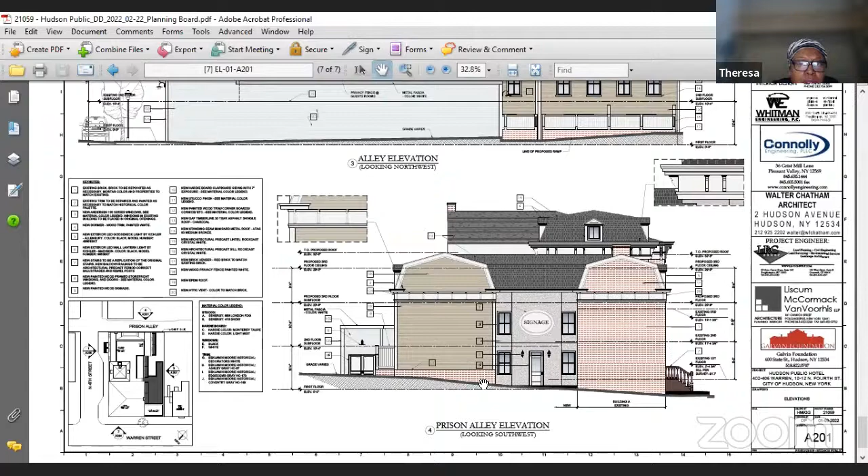Can I ask you a question? Absolutely. Go down, go to the Warren Street figure.

See the steps on the side? This is the reconstruction of the steps that are on the North 4th Street row houses. They're way in the back, they don't belong there in other words. No, they're down here, so you're seeing that down the street.

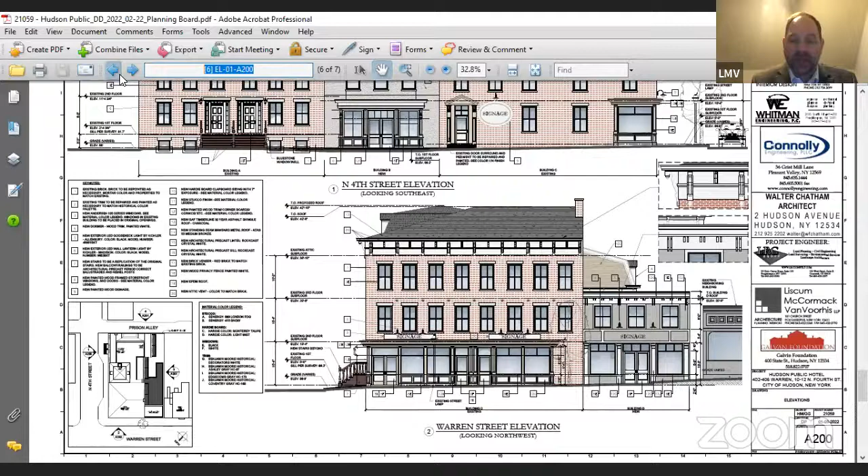And when you see the site plan, if we jump back to the plan, you'll see these are down here. You're looking at this facade, but those are way down the street. Okay, thank you, they looked like they were on the corner.

Yeah, elevations are a little misleading. Nobody ever sees a building flat on, perfectly straight.

So we've identified a great deal of information. We've called out all the materials, the windows, and all the colors, and hopefully there's adequate information for you here. We've identified some of the cornice reconstruction where we're going to be doing new cornices and have provided some detail on that as well. So I think we feel we've got a fairly complete design intent here for your reaction and subsequent submission to the Historic Preservation Commission.

So with that, I'm going to turn it over unless anyone has any questions on the elevational architecture. Have you submitted to Historic Preservation already, or is that coming up? Not yet. We felt the best process would be to start with your board for initial reaction, and then we will be submitting within the next month or so to Historic.

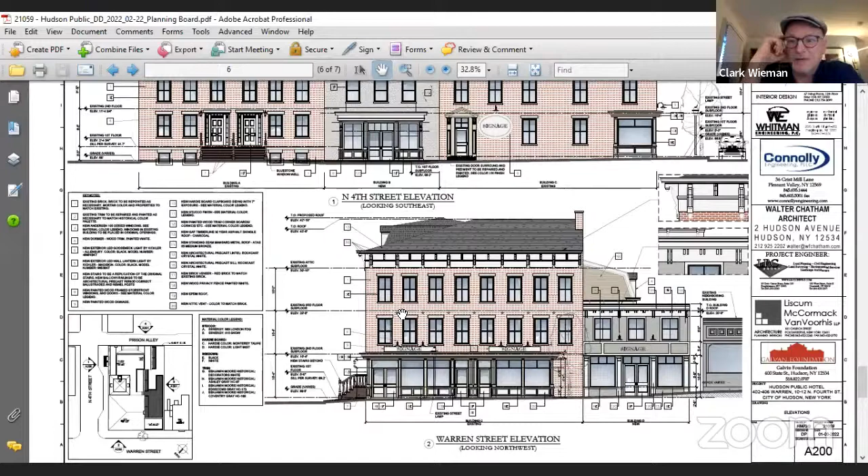Great, and I guess here's my initial reaction. That middle piece that you're adding between the two historic buildings, I'm no architect, but it seems to be wanting to look historic while still contrasting with the other two historic buildings. I understand the general architectural philosophy of not necessarily trying to replicate historic buildings, but making it stand out. But it just seems to me a completely different architectural look than the other two original structures. So maybe you can speak to that a bit. Again, just me as a non-architect, but someone interested in good design, it seems like it's sort of out of place and doesn't fit well with the other two structures.

Understood. Let me give you a little feedback of what we received from SHPO's review, as well as the rationale for the need for this connector building to be taller. SHPO felt that this connection was a little too ornate, so we've simplified the cornice, simplified the windows, simplified the window headers, really pulled that down, and went with a simple gray stucco material there. And that's a 2 to 3 foot step back.

The reason we have the mansard roof up on top - the other thing they didn't like was a very ornate dormer, which if you recall from last month had a much more sculptural dormer on top. So we stepped that back to match the dormers on the row houses. But the reason this has a taller volume is we have an elevator in this building, and the elevator goes to the 3rd floor and is required to have an overrun, which is fairly close to the facade. We really didn't want a modern look of a penthouse structure sticking up out of the building - we wanted to keep that inside a roof volume.

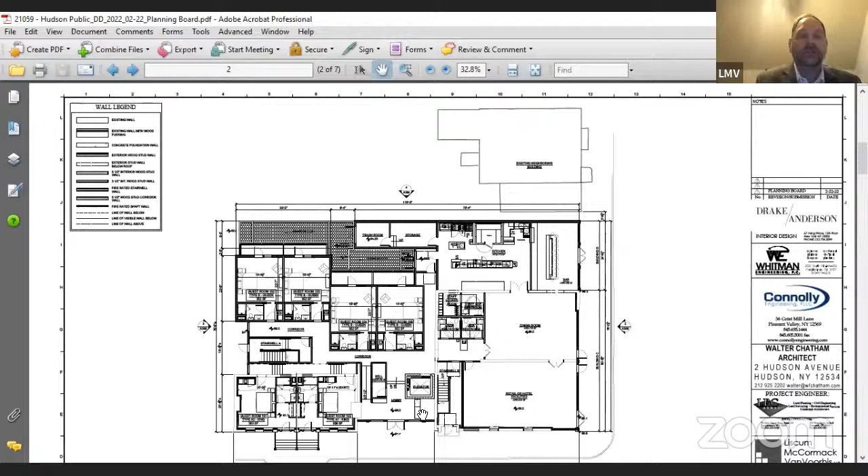Let me jump back to the plan. So the elevator's right here, that close, and it needs to have that 5 or 6 foot overrun from the top of the ceiling of the third floor. So we're trying to keep that enclosed in a roof volume, and that's why, serviceably, that building is volumetrically taller.

Okay, I mean that's helpful. We thought it would look funny, quite frankly, if we had some kind of a box penthouse sticking up out of the roof. North Fourth is narrow enough, but the walking view down Warren opens up enough that you would see it from a distance before you crossed North Fourth, so we wanted to try and keep it enclosed.

And in January, a member of the public had asked a question - I don't know if this is the right time to ask it - about where you're placing your air conditioner units and stuff on the roof, and we also received some questions regarding the noise associated with that. So we provided you with an engineer's report on that. The HVAC systems proposed for the hotel are going to be ductless central heat pump systems. There are several outdoor heat pumps connected to indoor air handling units. Those will be on the roof, but beyond the facade - you won't see it, it's actually internal.

We're specifying Mitsubishi R2 Hyperheat product lines. I don't expect you to know what those are - I don't really know what they are, but they are one of the most energy efficient and quietest products on the market today. The noisiest of the outdoor units will have a sound power rating of 68 decibels maximum, taken from 3 feet from the unit when running at full speed, which will be very rare. That'll only run at full speed on the very hottest and very coldest days. In the spring and fall, when the hotel requires heating in some rooms and cooling in others, the outdoor units will not run at all.

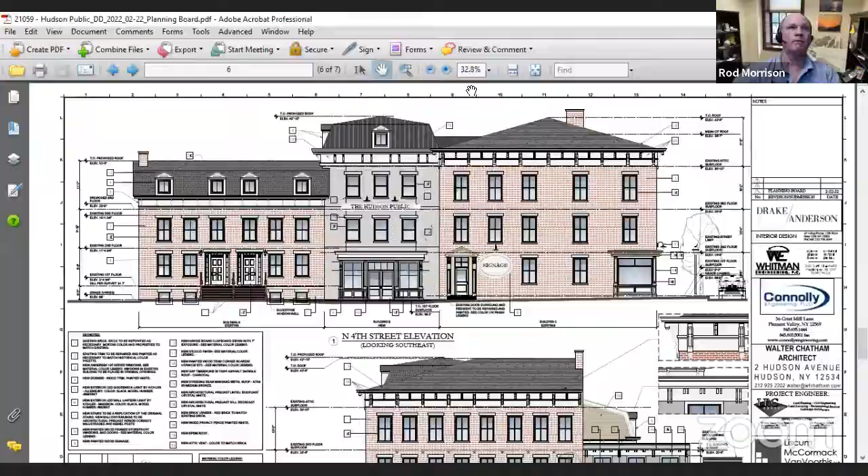All right, Rod, are you good to jump into site? I'll stop sharing. Sure, yep. Everyone, hi, Rod Morrison from the LRC Group. We're the civil engineers and landscape architect working with the rest of the team here. If I can share a screen as well, let me jump over to it.

Well, that doesn't help you.

Let me jump over to - we created a somewhat colored site plan to show you what our work would be, to go along with Don's and the architectural team. Again, North 4th here, the section of Hudson Public we were just talking about is in the middle in this location. So we've created an accessible entry with a step in, a walk in from North 4th, proposing the reconstruction of this entire side of North 4th to be a matching concrete surface grid pattern similar to Warren Street.

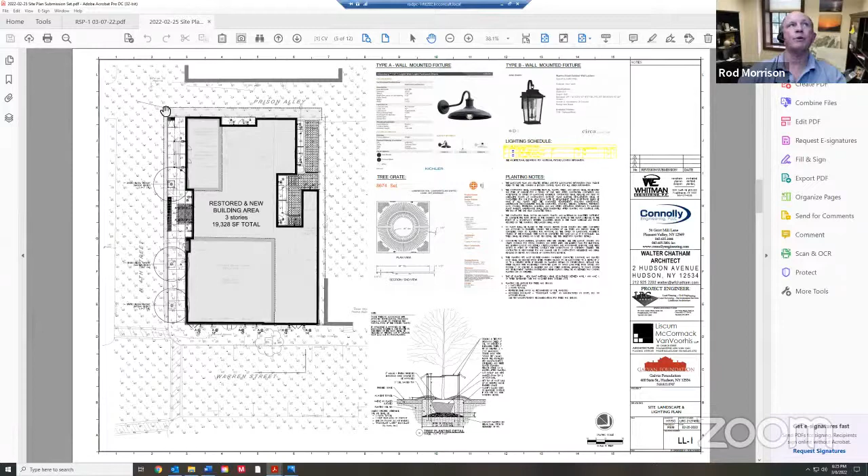The other wall-mounted fixture, which sits closer to the building, would be infill in between those. Those would be largely on North 4th Street, where the more prominent entrances on Warren Street would all have this more substantial fixture. In addition to that, the tree plantings would have the typical matching tree wells. Anywhere here in Warren Street where we ended up needing to repair or infill, we'd be matching that concrete grid pattern and really reestablishing the nice sidewalk presence down to the intersection, and then extending that for quite a tremendous improvement along North 4th out to Prison Alley.

I think in the scope of our element, again, there is a walkway out of the building out to Prison Alley. That's been made all accessible. Our element is a little bit limited. If there are any questions about that, happy to take them.

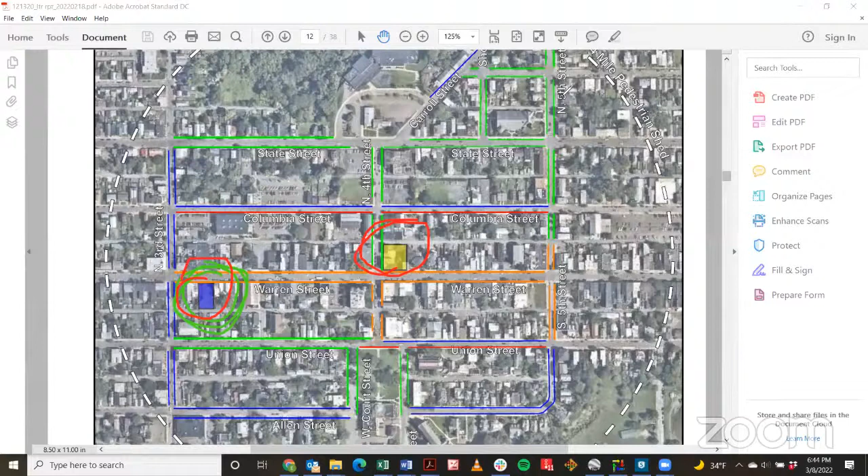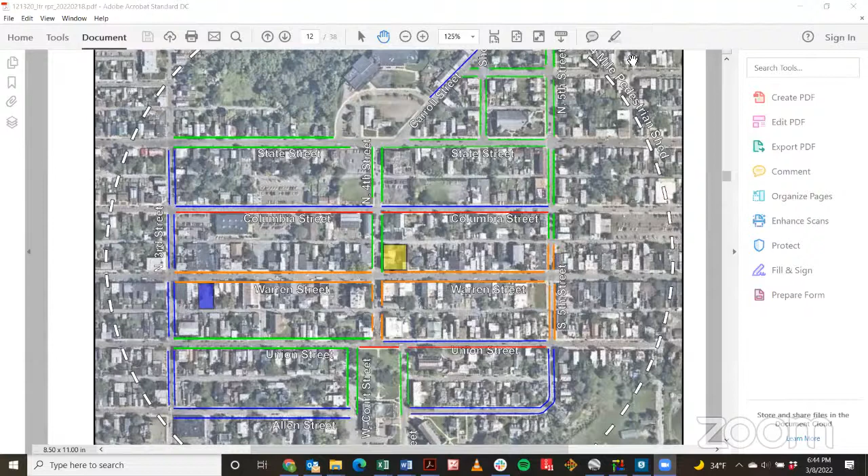Well, it doesn't really matter what lot we're talking about. What I'm calling into question is that wandering around at midnight and talking about what's available at midnight does not actually address the fact that your guests are going to want to park not at midnight, but at 6 or 7 in the evening after they've checked in, and then go about their business, going to restaurants or whatever in the morning. So I don't think looking at what's available at midnight is the correct approach. That's all I have to say. I will stop, thank you.

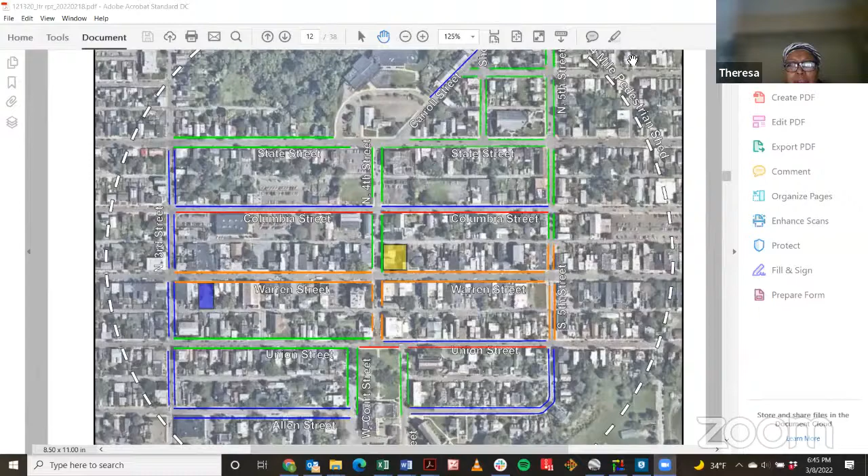I have a question too, just to piggyback on Margaret's. As a resident, board member, and previous business owner on Warren Street, I do recognize those municipal lots get full on a regular basis. Literally, it doesn't matter what time of day it is, there's nowhere to park. I'd be lucky if I can find one parking space. So my question to you all is, have you considered valet and perhaps purchasing spaces down by the train that you could utilize as parking for guests?

Mark? Well, we have not considered a valet to park close to the train, just because the assessment does show that regardless, that municipal lot is only about 23 spaces.

The assessment we did showed there's more than adequate on-street parking and metered parking that becomes free overnight to accommodate the hotel. We're not saying we're relying on that municipal lot, we're just saying it could supplement it.

The analysis was done between 10 and midnight. I think it was done between 10 and probably 11:30. So it wasn't like we were out there from midnight till 6 in the morning, it was done a little earlier.

Yes, it's not like the hotel requires no parking earlier in the day, but the maximum is past 10 o'clock, when people are coming back. I go to lots of hotels and I agree, sometimes you come back at 6, but sometimes I don't get back till 10:30. That's when the maximum number of vehicles are required, past 10 o'clock at night. But I agree the hotel will require parking earlier in the day, just not as much as overnight.

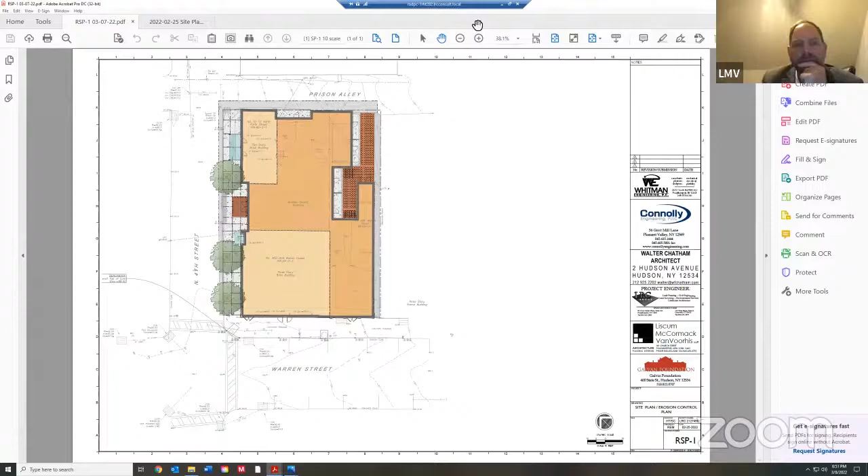Where is he? Dwayne, are you okay with that? Thank you, yeah, I'm okay with it. Bill? Yeah, hi, before I make my comments, is Galvin done with their presentation? No. Okay, I'd like to wait till after they're done with their presentation to talk. Is that okay?

We're gonna move on to the next issue. I think you should say it now. Well, I'd like to hear the whole presentation, in case there's something I want to comment on. Is that okay to do it after they're done? Are you guys finished? We've concluded our presentation for this evening's meeting. All right, done, so now I'll ask you a question. Excuse me, Margaret, could you put your hand down? No, I still have a question. Oh, okay, sorry, I didn't know. Okay, Bill, go ahead.

So, this is just the wrong location for a 30-room hotel. It's pretty obvious, and most of it has to do with parking. There's a few things that I can't believe I heard tonight.

Mark Ndoli's offered us some sort of study, which I'd like to see. That's a question, actually - is there an actual study that the public can see that you've done, Mark? Yes. And have you submitted it to the board? Yes. Okay, thank you. What I will say, just real quick, is I'm going to resubmit it because I noticed that when we put the final study together, one of the tables is missing, so I'm going to resubmit that tomorrow.

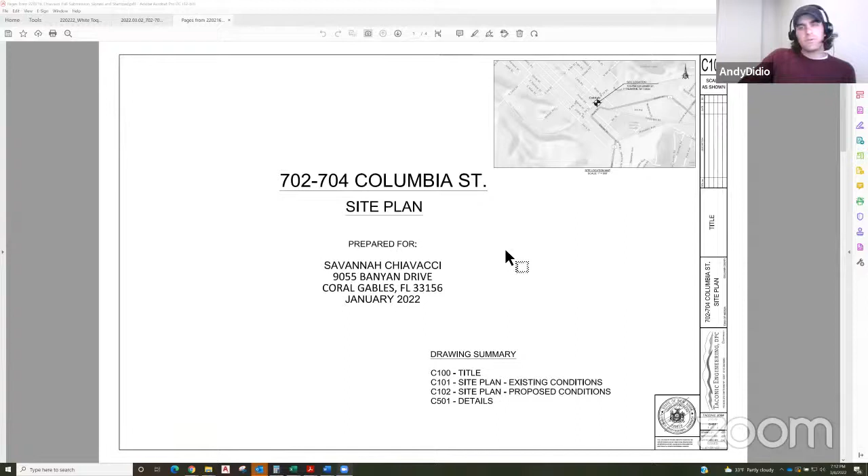So yes, it's 702, 704 Columbia Street. Just to give you an orientation, this is the park here, Columbia Street and North 7th crossing. This is the existing condition plan, essentially the survey. So it's a 3-story brick building.

front facade. And then just while I'm here, I may as well take you around the corner. So this is the back portion of the lot. You can see there's a portion of 2-story, and then actually in the back here, there's a portion of 1-story, and then the lot comes back to this kind of alley spur.

But there's that 1-story portion. So get rid of that. So that gives you a lay of the land of the existing site, and you can see the 2-story, 1-story, 3-story, and then the extension of Long Alley.

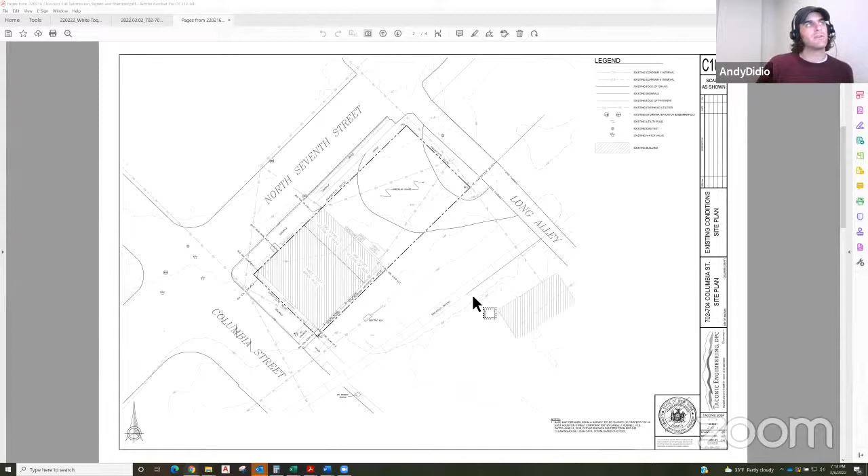So the proposal is to renovate the building, obviously, and do a minor addition off of the back. What would occur is the portion of 2-story that's on the North 7th Street side would be extended.

So the single-story, existing single-story would be elevated to be a 2-story section, and then a single-story addition off of the back of that. That would be just an expansion of what would be the proposed commercial spaces downstairs.

In addition to that would be egress stairs. Again, as Theresa had mentioned, 4 residential spaces, 2 on the 3rd floor, 2 on the 2nd floor. And so egress stair out the back.

A portion of that, so the building would be bisected internally. The North 7th Street side would be a restaurant space, and the owner currently doesn't have a tenant. Ultimately, she would look to kind of white box, quote unquote, the restaurant portion.

So build out the kitchen, establish the cooler space, basically generate the space that a tenant could come in and outfit and operate as a restaurant space. As a portion of that would be a rear courtyard that would get fenced in.

And I'll show you some of the elevations that kind of show what that looks like. The back courtyard space would also get bisected as a portion for the residents. So the residents would come down and be able to have kind of outdoor courtyard space in the backyard.

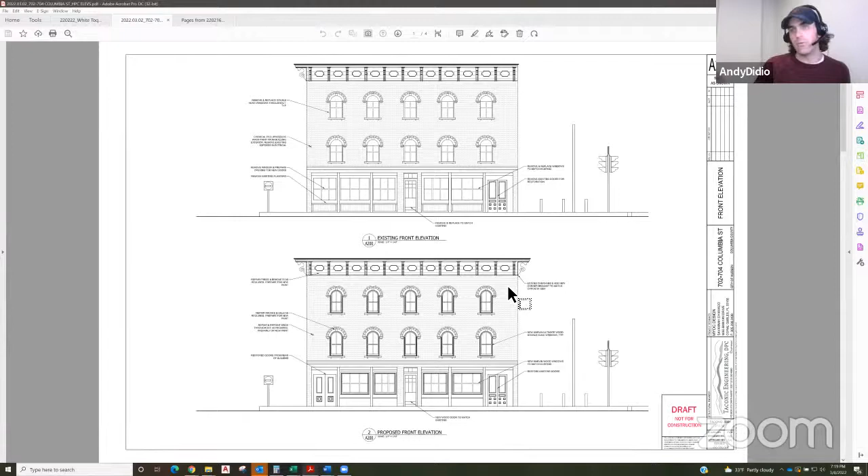The intent here would be to add a second set of doors on the North 7th Street side, again to help as an entrance for the restaurant space, and restore some of the windows. You can see on this side of the building the corbels and the soffit overhang has been either removed or no longer exists, so the intent would be to restore that.

There's this Bilco door, an overhead door that would go away, and a new opening would be made in the masonry to create storefront glass that wraps the corner.

This shows the single story addition off of the back with the egress stair up to the rooftop decks. And then here's your rear elevation.

This is the existing, and I'll quickly pull this back so you can see there's that Bilco door and the overhead door, and that series of staircases that go up to this level. So this would be the new back aesthetic, as if the courtyard fence wasn't there.

So you'd have openings for the restaurant space, one for patrons, one for employees to come out into the courtyard.

The egress stairs are kind of deceiving because you see them in a row. It looks like one set of stairs, but you'd come up to this one, the deck, and then this would be on the back plane.

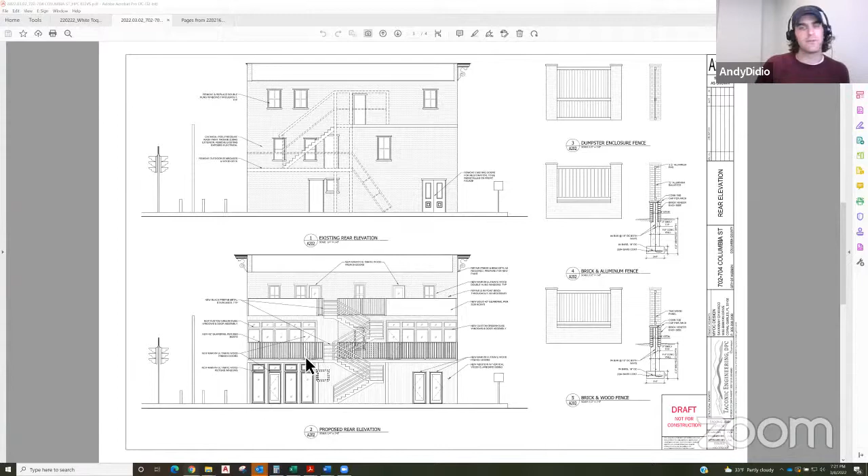And then storefront glass essentially on the back retail portion that would come out to the courtyard. And then this is that tracks elevation.

You can see where right now currently the brick overhang, the soffit area with the corbels doesn't exist. They'd restore that back to the face of the chimney. And then this is, again, that track side extension with the deck and the stairs that lead up.

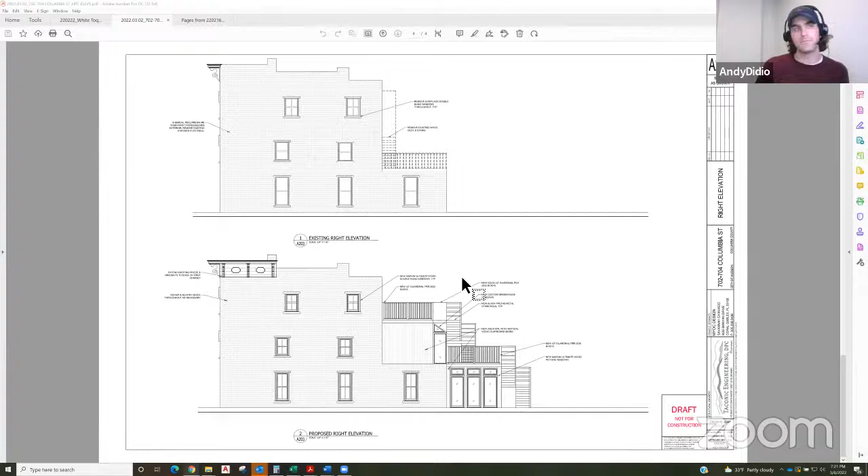Okay, happy to answer any questions. I'll just go back to the site plan to make it easier.

Any questions? Yeah, I have just one question. It's great that you're going to have parking, I have to say that. Thank you, we don't confront that very often.

Will there be any handicap spots there? We're not proposing any handicap spots, mainly because the residential spaces won't be accessible. So we're not having an elevator, there won't be a lift. So none of the residential space will be ADA accessible.

And then really the last two spaces are exclusively for the tenants — the restaurant owner and the main retail space tenant. So really it's not for public consumption; essentially it's just for the residents and the tenants.

Andy, is that permissible under the building code? I thought if you provided spots, you had to provide an ADA spot, but I'll leave it to you to work out with Craig.

Thanks. Sure, so we want to move to them establishing an escrow account. So the first question for the board is, this requires site plan approval, and is this a significant change that you want to schedule a public hearing for?

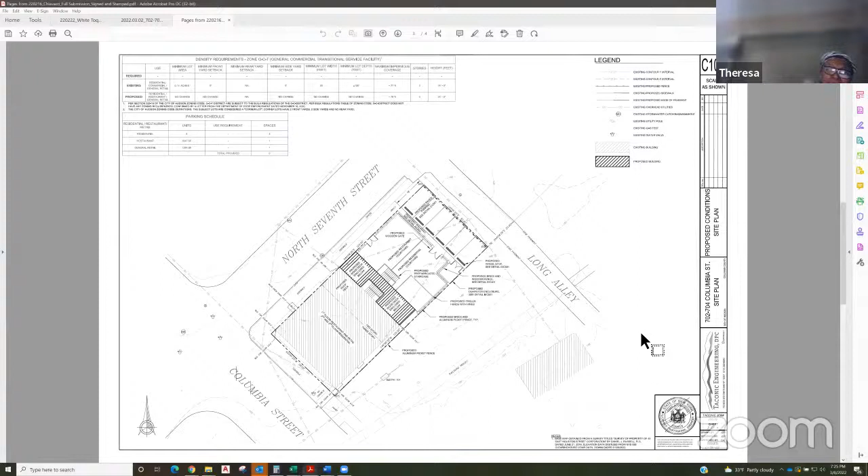I'll make the motion, Teresa. Okay, and who seconds? I'll second. Okay, Jean seconds. All right, all in favor? Aye. So we make a motion to establish escrow of $2,000.

I just want to say I'm less expensive than engineers, but that's okay. Oh, I don't know about that.

Okay, can you stop sharing for a moment, Andy? Sure, oh yeah, sorry. So we need, Andy, the contact person for the escrow, since the owner is not here. We need to know who's the contact person for the escrow, because they have to send it in like tomorrow. We don't want to be going forward with this without getting escrow. Sure. And that's just made out to the City of Hudson, correct? City of Hudson, it goes to the clerk's office. Okay, and I think it goes to the treasurer's office, right? Or the clerk, either one.

So I don't know if the board members want to go through their questions first, or if you want me to walk everyone through the resolution we have prepared. Can I ask one more quick question? Sure, let's go through the questions. Andy, I think you said it, but there's no current restaurant there right now, right? Correct, so that's a plan.

I'm just curious, has there been any modeling of how traffic will increase around that, or not traffic, but just activity around that particular intersection? I'm just curious, I don't really have any concerns, I'm just curious.

Yeah, we haven't. I think it's one of those situations where you've got that kind of core of 5th Street, 6th Street, and now really developing into 7th Street as being kind of auto-independent, with people coming up to the park, and hopefully extending some of that retail use where it's mostly foot traffic. So whatever shopping is happening, the pedestrian traffic that's going on there, the intent is really just to have it be an extension of what's already taking place on Warren.

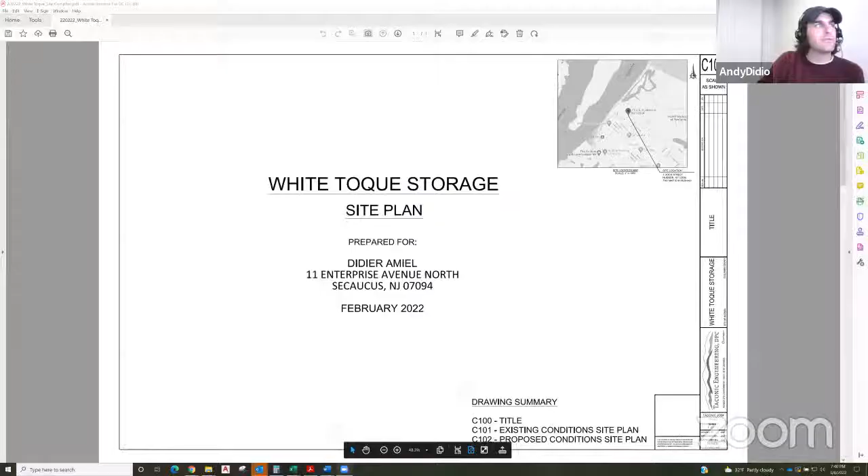Let me do a screen share—I'll just kind of get right into the site plan. So 7 Dock Street, I think you're all probably familiar with it as Town and Country, the food preparation and distribution site right across from the highway department. Yes.

So I may as well do this for those of you who may not be familiar—I'll just do the street side view again. Seems to be helpful, Dock Street.

So on Dock Street, here's the City of Hudson DPW building, the water plant. And here's the Town and Country site. Right now there's an entrance on the northeast side that goes around to the back of the building. This is a combination of food preparation, retail space, and refrigerated storage.

So they sell prepared foods, frozen. They're also kind of restaurant distribution, restaurant wholesale. That driveway continues around the backside, and they actually also own this portion of gravel lot here. So I'll go back to the site plan so you can see the extent of it.

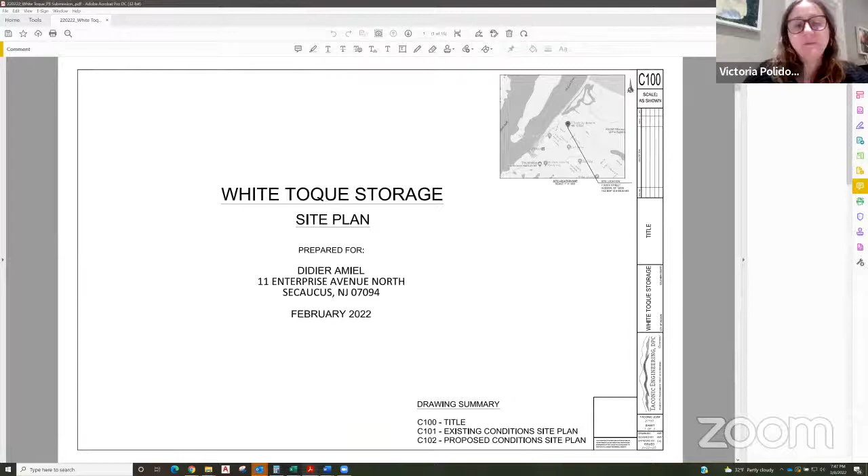What do you say, Victoria? Well, again, when we spoke, we didn't have the plans. So for everyone on the board, Teresa and I had a phone or Zoom conference last week just to review the status of all the applications, and we didn't have these plans available at the time of that discussion.

Victoria? Yes, yes, hi everybody. This is Craig. Hey, Craig. Hi. I'm assuming you're talking about the letter I sent you? Yes, that's just a letter saying why they're coming to the planning board. Their proposal is in the application.

It's very clear in there that they're expanding, an addition for a freezer to expand their business. The letter I gave you is just to say why they're coming there. They're coming there for a site plan for the purpose of an addition based on the zoning code. So that's just the introduction letter I give to you. That's really nothing, you have to look at their application to see what it says.

Did you know they're going to change the dock? Well, they're not going to change the dock, they're going to add to it with their addition. Yes, I did a whole review on this, and I don't know why nobody had the plans, because when I sent the letter and the application, the plans were with it. So I don't know what happened with the plans, but I think we had a request.

This is a typical commercial building that's looking to expand with an addition of a freezer. Whenever they're doing that, obviously they've got to make more room for shipping, which is why they're expanding their dock. I don't know why you keep referring to the letter, but I'm just giving you my input on it. So, well, the question is, do the changes in grading and stormwater rise to the level of needing an engineer to look at the plans?

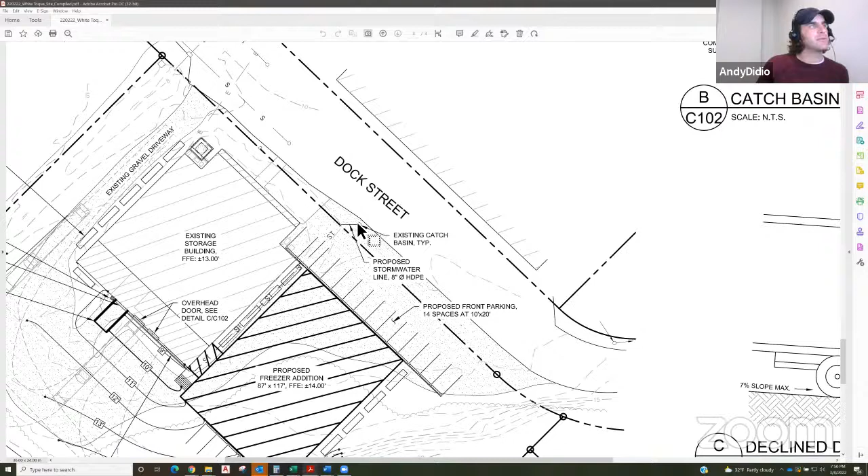Sure, am I still sharing? Yeah, so here you've got an existing catch basin on the road frontage, as well as a culvert that goes underneath the road right here. So that's all that's taking it, and you can see there's a diversion swale that comes down around the backside of the property now, directed there, as well as sheet flow from the existing driveway and the existing building. We're just cleaning that up, because you can see where that swale line goes now.

You can see the faint dashed lines that show the turning radii of the trucks, to show the size trucks that would be shipping and receiving can make the swing and pull in back into the dock.

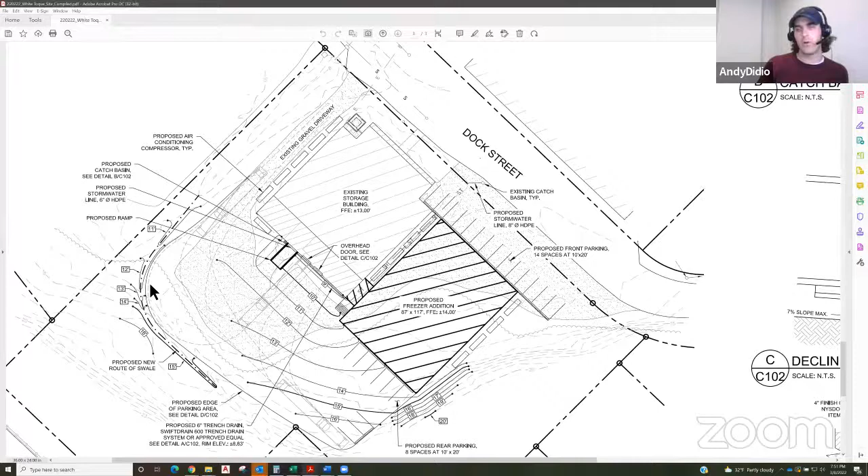So we're just tuning that up to coincide with the expansion of the parking area. So drainage isn't changing that much. No, it's pretty straightforward. The survey has, and that's what you see, this gravel hatch there from the existing condition. That gravel area most likely extends all the way around here, but has grassed in.

When you look back into this area, it's all flat. They've got their dumpsters back there. It's probably one of those situations where it was gravel at one point and didn't see a lot of traffic, especially since they're putting their dumpsters back there.

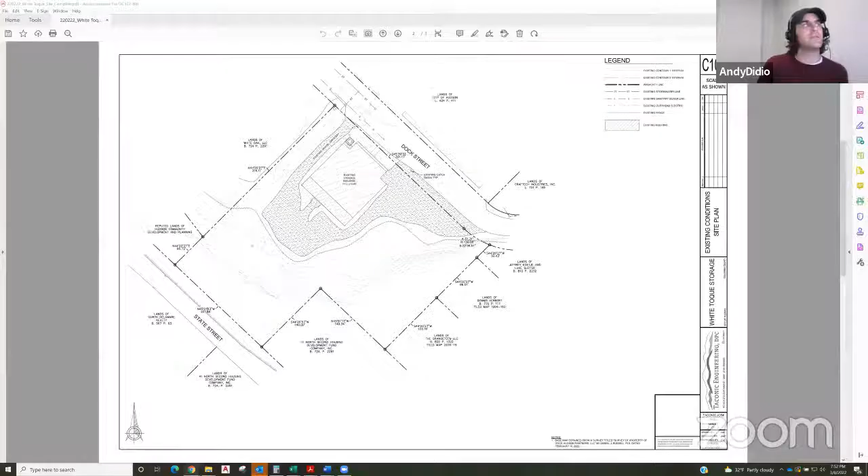Oh, you're not looking at what I'm looking at back here. Okay, thank you. So that most likely is gravel. So even in a sense, to your point, Clark, your impervious surface isn't changing dramatically.

I would say, based on what Andy just told us, I don't think we need an external third-party engineering review. I agree. I agree. Okay, I agree.

I mean, I guess in general, it's basically an industrial, relatively modest expansion in an industrial zone, right? There's not neighbors, residential neighbors. It's an area that's all industrial currently. Doesn't seem to have a huge amount of impact on anybody.

So the next issue would be, is a public hearing needed? Because it's discretionary for site plan approval. I don't see why personally. I think it's pretty straightforward, and it's away from the public mostly.

I agree with John. I agree as well. I don't think a public hearing is necessary. I agree too. Do I have to go for a motion on that? No. All right, you need a motion to set it, but not to set it.

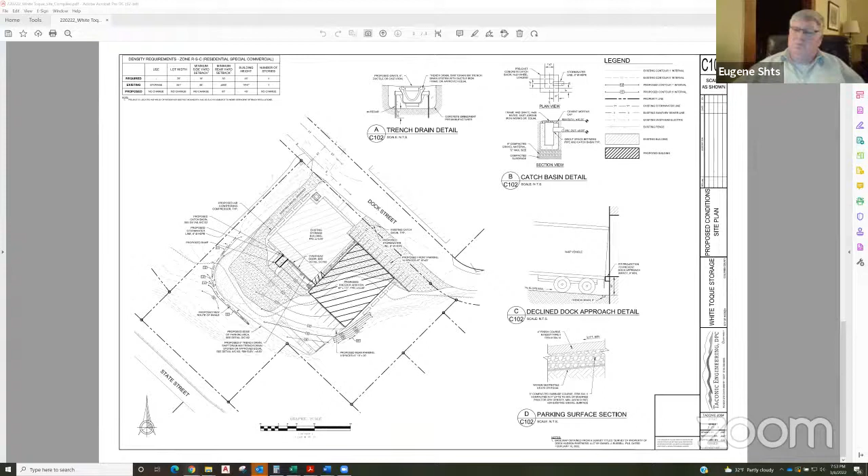So for four of us says no. How about you, Gene? No. You saying no? No, don't need it. Dustin? I agree. It sounds like that. Okay, so there'll be no public hearing. So what do we do?

Okay, so I have a resolution prepared for, oh Andy, can you stop sharing? Sorry. Share screen. I have a resolution prepared for 7 Dock Street.

It's not a type 2 action just because it exceeds 4,500 square feet. So by virtue of it being 10,000 square feet, it's an unlisted action under SEQRA, which means you'll have to review part 2 of an EAF and complete it.

So if there are no questions, you can make a motion to adopt the resolution. Can I get a motion to adopt this resolution for 7 Dock Street? So moved. Second, second. Valerie second. Okay, all in favor? Aye. Right? Okay, so we have accepted the resolution for 7 Dock Street.

Okay, great. And the next question is, I don't have an approval resolution prepared tonight, but you could do it by motion if you wanted to go through part 2 of the EAF tonight. Can I get a motion to go through part 2 of the EAF tonight? Or we can do it, when can we do it if we don't do it tonight? At your next meeting. Or we can do it at the next meeting. So can I get a motion to do it tonight?